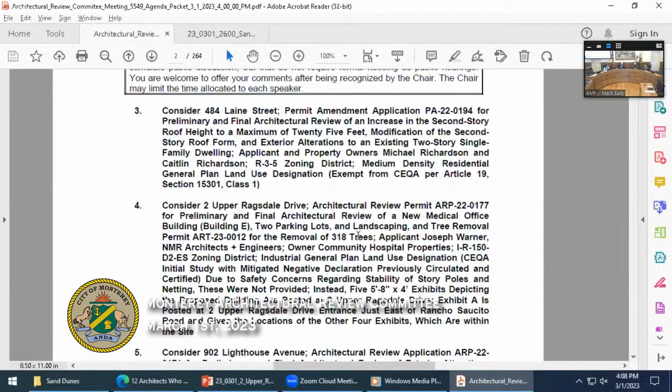All right, thank you. Next, we'll move on to consider item number 4, 2 Upper Ragsdale Architectural Review Permit ARP-22-0177, for preliminary and final architectural review of a new medical office building, 2 parking lots, landscaping, and tree removal permit for that project. Does staff have a presentation?

Yes, my name is Chris Schmidt. I'm a senior associate planner for the city, and I have been working on this project with the owners and architect team. To start with the recommendation, the staff recommendation is to adopt a resolution approving the preliminary and final architectural review and tree removal permit with conditions of approval.

I'm just quickly going through the subject property. It's located out in the Ryan Ranch area, and you can see the area of work on the right. Parking lots are proposed in the orange areas, and a new building is proposed in the yellow area.

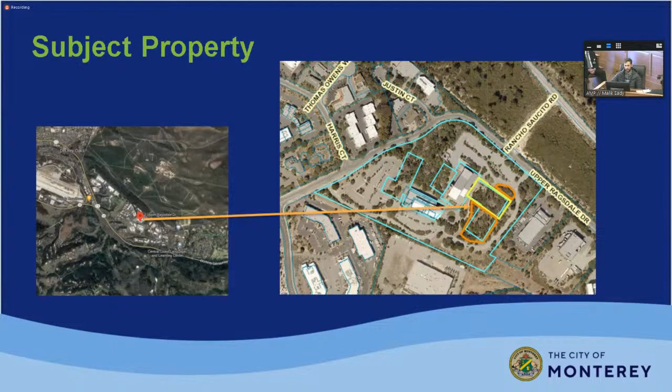So it's a 50,585 square foot medical office building, with a 21 space parking lot at the north side and a 130 space parking lot at the south, as well as new landscaping. The project would require removal of 524 trees, 318 of which are protected trees because their diameters exceed 6 inches at a height of 4.5 feet above grade. So these trees require the tree removal permit. 78 replacement trees are proposed as part of the landscape plan.

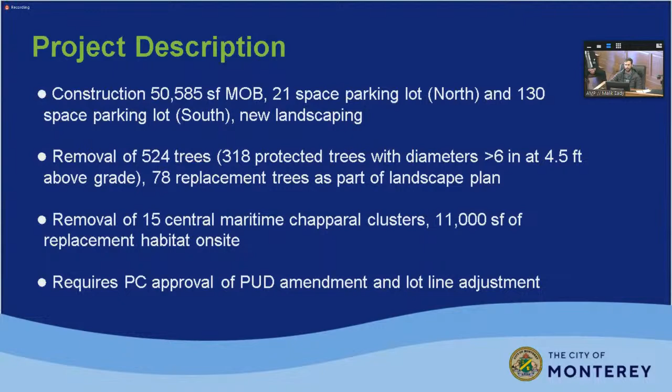The project would also remove 15 clusters of central maritime chaparral, and 11,000 square feet of replacement habitat is proposed on site directly adjacent to the new building. The project also requires Planning Commission approval of a PUD amendment and a lot line adjustment, which has been included as part of a condition of approval for this project.

So here's the site. It's part of a planned unit development that was approved back in 2002, which included 230,000 square feet of medical office space, open space, parking, and driveways. This would be the last phase of that development. The site currently contains over 170,000 square feet of medical office space.

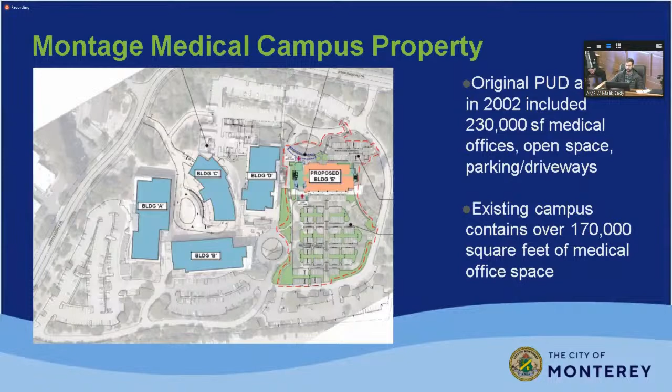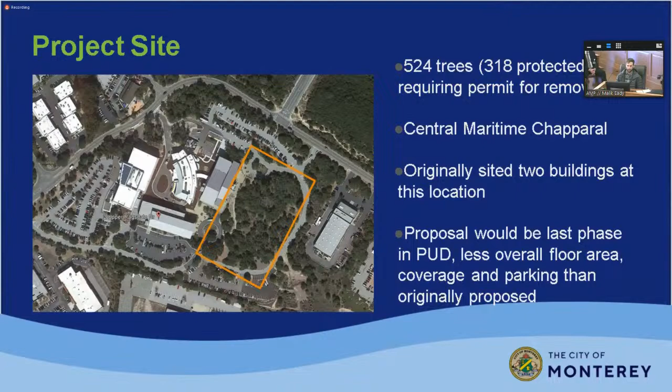So here's that area of work again. I've already mentioned most of the details on the right here. I will add, though, that the last phase would actually be less than what was overall approved in the planned unit development. This site was originally sited for 2 buildings, so it would be less overall parking and less overall floor area than the original proposal.

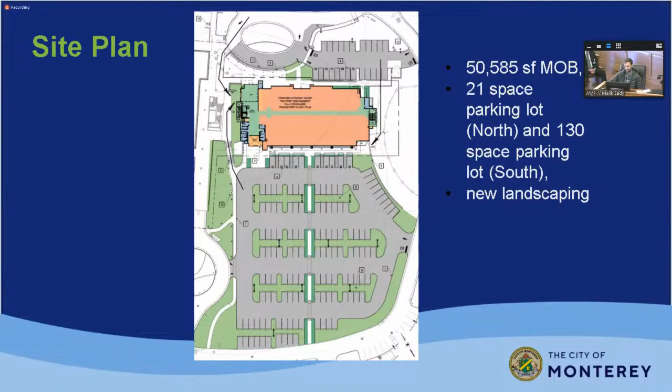So here's the proposal siting location, and I'll just quickly go through these elevations. I have some renderings that do depict the project fairly well that I'll show after these.

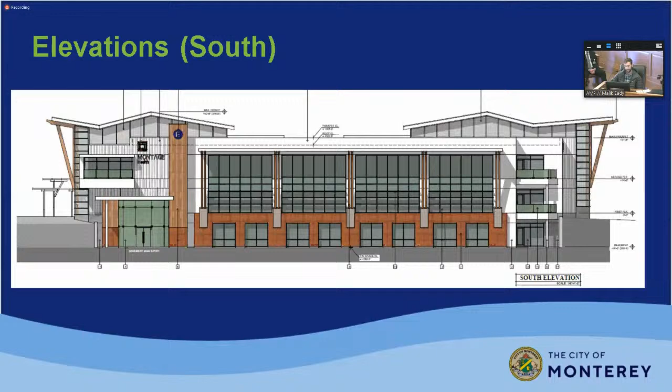And just to provide a little more detail, the proposal design is really similar to what all of the other buildings out there look like - large concrete form surfaces, wood veneer paneling, stucco siding, aluminum windows, steel beams and columns, and in this case a flat roof with parapets, with parts having standing seam metal roofing at the mechanical rooms.

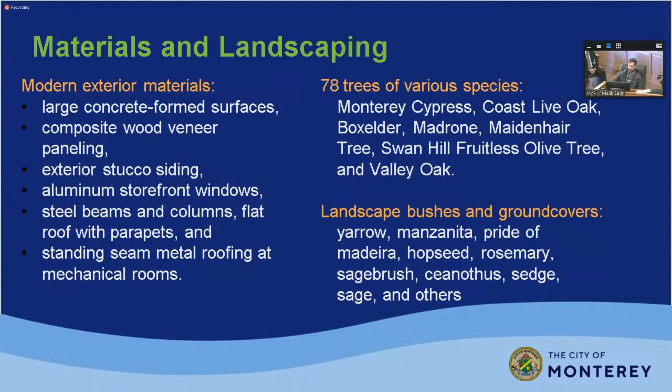A number of replacement trees are proposed, different species listed on the right there, as well as landscaping, and I do have a graphic showing the landscape plan.

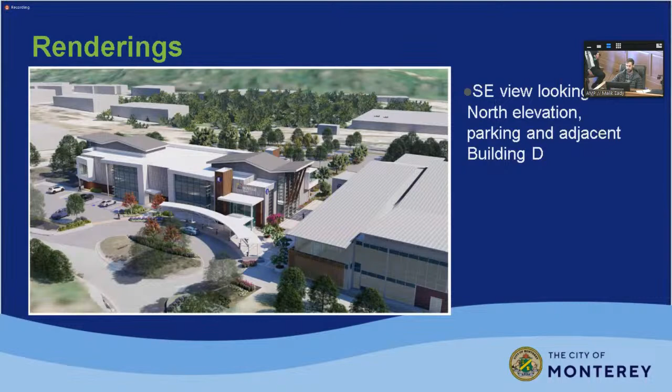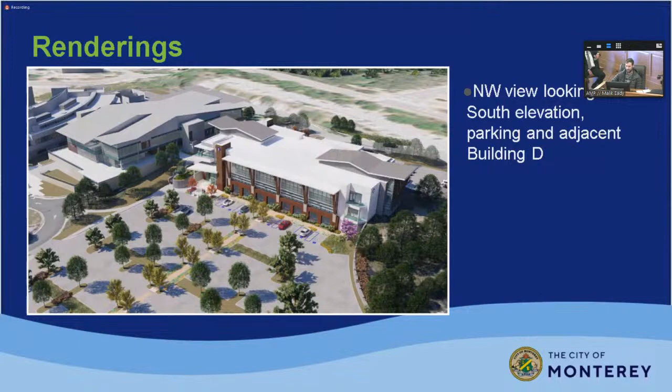And then this is the northwest view of the south elevation, with building D on the left-hand side, and you can see the proposed larger of the 2 parking lots. On the right is the habitat restoration area - the trees in that area would largely be preserved, and whatever remaining space would be used to rehabilitate that habitat.

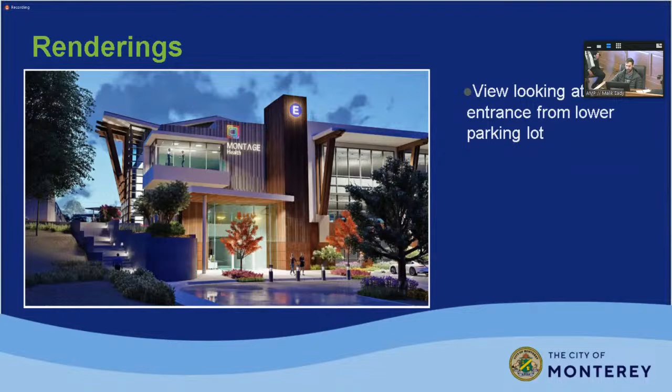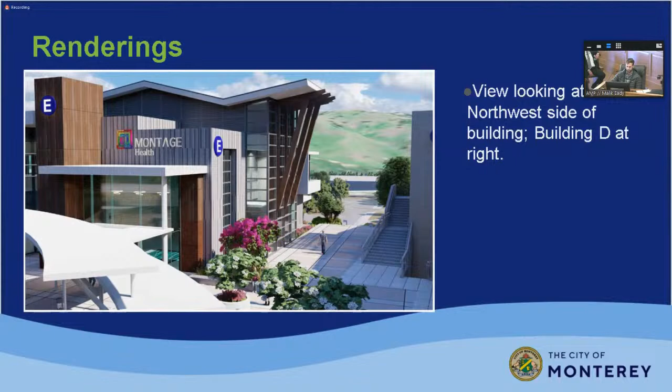And then the individual plantings are shown here - I'm not going to go through each one, though.

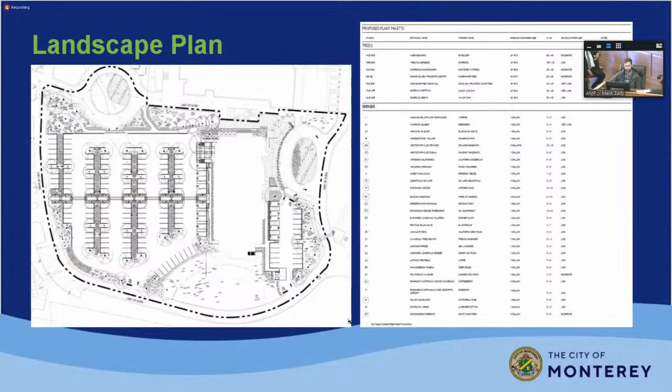So I'll just summarize the findings for approval. Staff was able to make these 4 findings that the ARC is pretty familiar with by now. This project is similar to the existing buildings on site, in terms of massing and design.

There are no view, privacy, or lighting impacts. There are no residential units or anything nearby, and the entire area is industrial zoned and contains commercial buildings and offices - in this direct vicinity it's mostly medical offices. The proposal is also consistent with the general plan land use designation of industrial, which these days is primarily used for office uses.

Staff has included the condition for the PUD amendment, which is necessary for the lot line adjustment. And lastly, this project does use high quality materials that are compatible with the existing development, and includes new trees and landscaping compatible with the surrounding development and the habitat area on site.

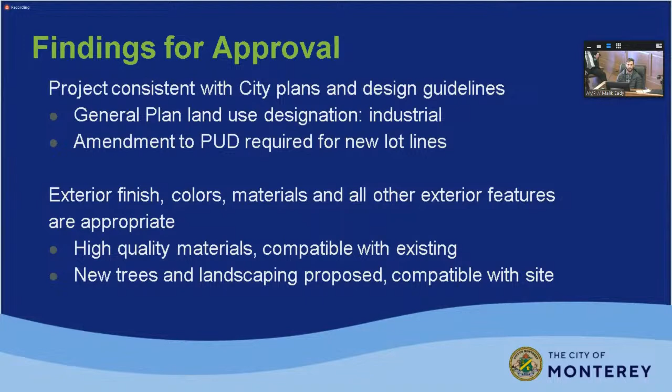The last finding is that in situations where healthy trees prevent reasonable development of permitted uses, the trees may be approved for removal. So the existing trees would prevent reasonable development of an approved PUD, and removal would be consistent with that PUD. The site, as I mentioned, was slated for 2 buildings, totaling more square footage than proposed today, and there is new landscaping and replacement trees proposed.

So that concludes my presentation. Again, the staff recommendation is to approve the project. I am available for questions. The project architect is here as well, and I believe he has some imagery to show as well.

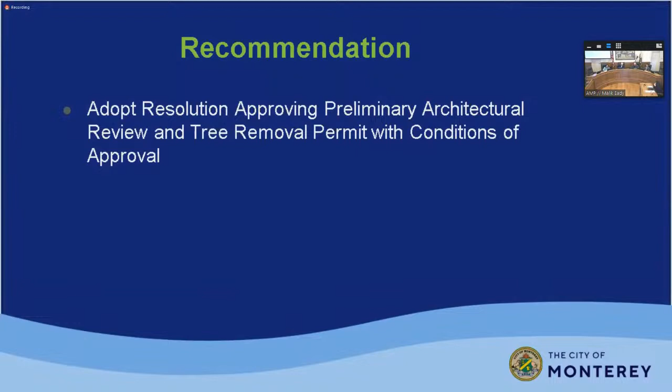Yeah, thanks Chris, nice presentation. So we're taking out 318 trees and replacing them with what, 78, something like that? That's right, 72? And what are the city guidelines for replacement - 1-to-1, 2-to-1, 3-to-1 - and is it based on the usage of the site, or I thought it was more of a, if you take out one tree, you've got to plant 2 kind of thing.

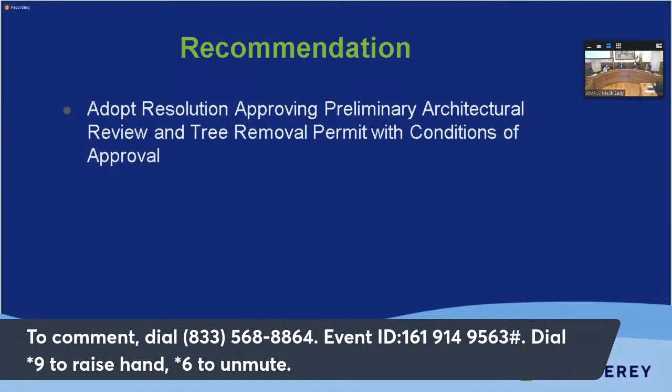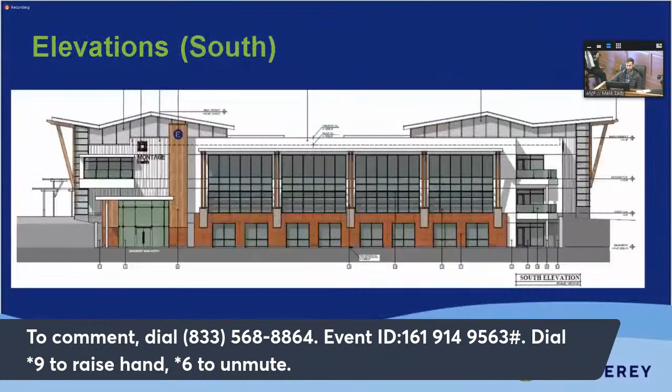So what the city code says, in addition to this finding for approval, is that up to 3-to-1 replacement can be required, but that does include 0 to 3, so no replacement can also be required. What we would look at is whether the site can actually have more trees planted on it, and whether it would be done in a manner that those new trees can survive and don't cause overcrowding. And when we looked at this site, it is already fairly overcrowded.

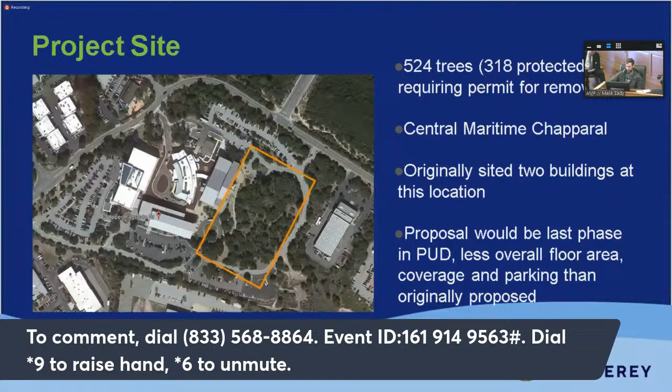Looking at this older aerial of the site, there are trees around the perimeter as well as in the interior. I think they've actually shown a pretty dense planting plan of these trees. There are a few areas that contain just shrubs on this end here, but it was a sufficient plan for this development. I think the architect may have some information as well.

I have a follow-up question. We're asking because I think the city should consider tree planting offsite, and also a fee associated with removal. Those are policies I've seen other cities use. So it's not just about what that site can handle, but it becomes a financial incentive to be more creative with your design, be it underground parking or other methods. That typically forces teams to make those decisions, because it's financial. And if you can do surface parking, then of course they're going to say sure.

It's a good question. The code does say replacement would preferably be on site. I do believe there are options for in-lieu fees. Historically, I think our staff prefers on site because it has the property owner maintaining them indefinitely, whereas sometimes it's harder to have them go water and feed trees that are offsite. There have been a few that I can recall of in-lieu fees or offsite planting.

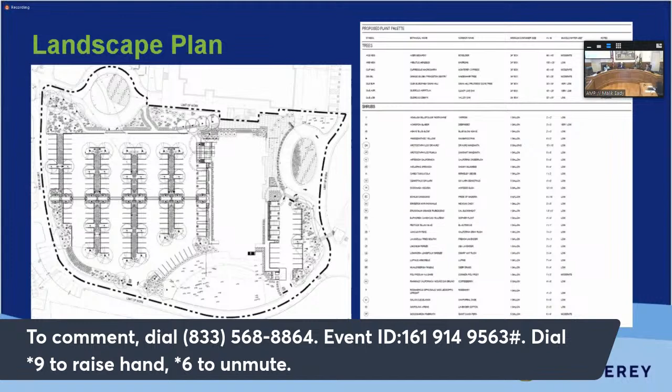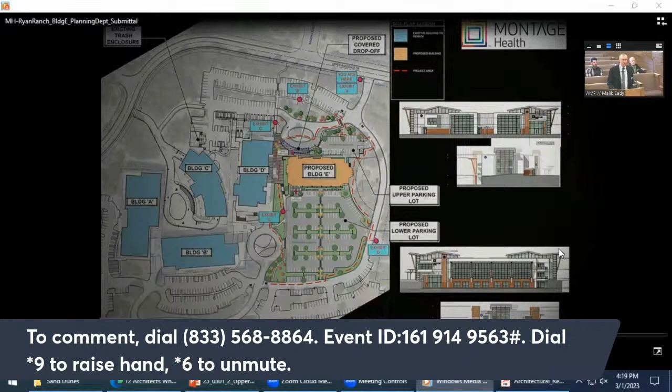Good afternoon. My name is Steve Gonzalez. I'm an architect with Nichols, Melburg and Rossetto. We've worked with Montage Health in the Monterey area for probably the last 15 years.

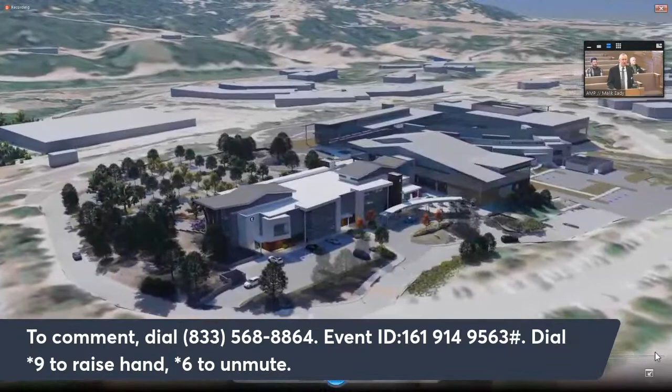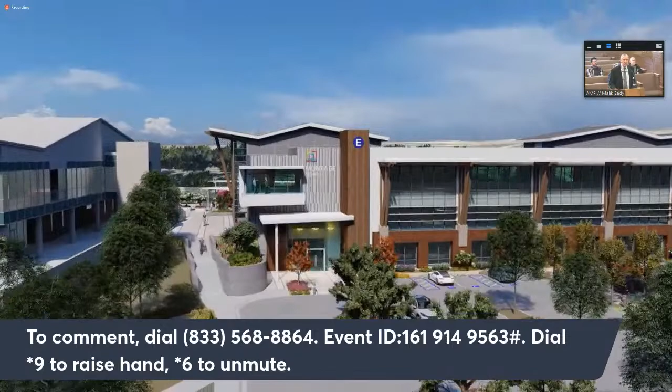I think Chris did a great job of presenting the project. I don't think you folks, if I'm reading the room correctly, have any comments on the content or the use of the project. There was some discussion about the trees, so to respond: if you look at the arborist report, the arborist states that the trees we're removing are in an area with substantial overcrowding, resulting in poor health. Many of the trees being removed have like five trunks coming out of a single common root area, so in general these trees are in declining health.

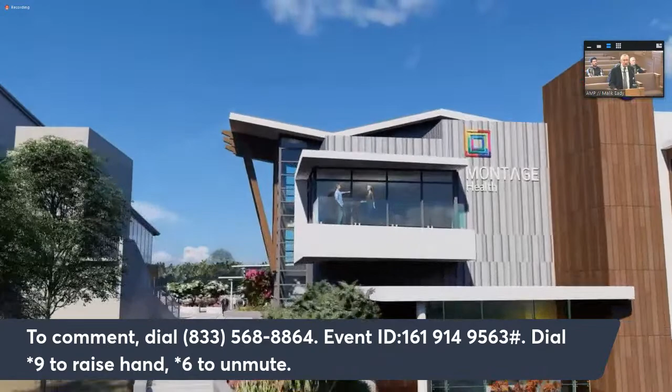Not only in this particular area where the lower parking field is, where the preponderance of the trees are being proposed for removal, but throughout a lot of the Ryan Ranch area, I think you have the same kind of overcrowding and declining health of trees, just from my observations driving around and looking at the area.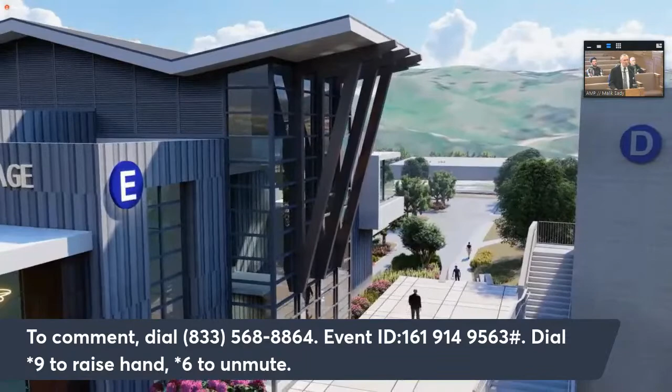The original proposal did have underground parking. Unfortunately, to construct the underground parking, you disrupt basically the equivalent area that we're disrupting for the lower parking field. One of the exhibits, I believe on the site demolition plan in the package you have, under attachment A, shows the outline of our best estimate of what that area of disruption would have been had the project approved in 2002 gone forward.

So our company, and I know Montage Health, we value the environment. We're not here to just recklessly remove trees.

But looking at the stand of trees that we had to work with, we don't see a lot of salvageable area there. And the specimen trees on the site, I think there were 7 of them in the arborist report, 24 inches in diameter or greater.

One of them is dead. It was a beautiful tree at one point in time, 38-inch diameter coastal live oak. But the preponderance of the other specimen trees we are saving.

And they're clustered more or less on the south westerly corner of the site, in an area where they're not subject to overcrowding like the balance of the site is. So we did deliberately design our parking fields and entries so that those trees, which I think are the best on the site, could be retained.

With respect to replanting on the 2 Upper Ragsdale site, I don't really see a lot of opportunity to do that. The areas that would be subject to replanting, widespread replanting, are already forested. And sadly, I think they're in the same situation where there's overcrowding, too many trees competing for sunlight and nutrients out of the soil, resulting in canopy fragmentation and overall poor health.

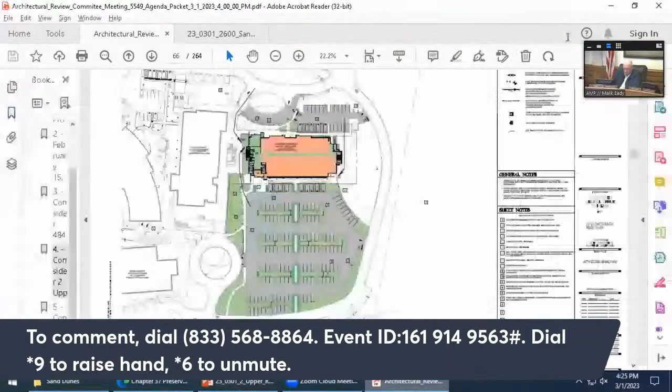Yes, could you show that? One second.

I have been up to that area, and those are scrub oaks. They don't grow very big, and they are very healthy. Trees, they have now found out, do very well crowded because they nurture each other by their roots. This was found out by the scientist who wrote the book, Finding the Mother Tree. So when you disturb all that soil, you're killing all the mycorrhizae that retain water and give sugar to the trees, and the trees in exchange give nutrients to this mycorrhizae. So those trees are fine.

I think this architecture firm needs to go back to underground parking. I don't buy the story that that's going to cause more damage. I don't see how, because they're going to be building on that site anyway, so they dig underneath first on that site. And it's just that area that they're building in where they're putting that underground parking.

I don't see how they're going to avoid having to cause a lot of destruction.

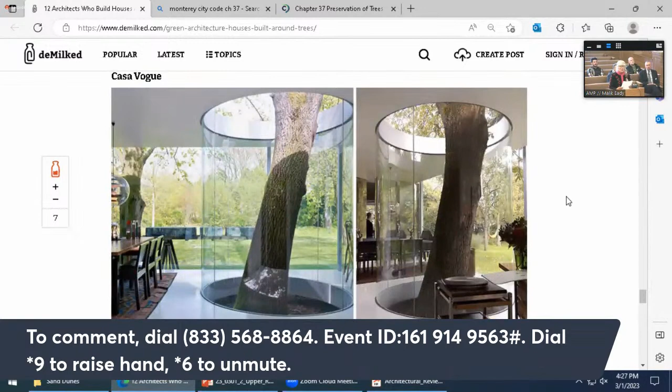I'd like to say that 300 trees supply 78,000 pounds of oxygen a year, and 300 trees take in 13,600 pounds of carbon a year, and one large oak tree can transpire 40,000 gallons a year. So our rainfall will be reduced, the wildlife will be reduced, and you can't mitigate because it takes 50 years, sometimes 100, for these oak trees to go back to the size they were.

So once again, it is a travesty to say that this is a mitigated negative declaration previously circulated. I mean, that's just criminal, because it goes against everything CEQA tries too hard to protect, resources that our very lives depend upon, because removing so many trees hugely affects the air, the water, the soil, the wildlife. And what is CHOMP going to be bringing in? Tons of cement, building products made with wood, tons of trucks, pollution and noise pollution.

So by refusing this permit and saying to them, you have to go back and integrate the trees, you're going to have to do that. And you're going to have to either find another spot where there's less trees, or prove to us that you can be more creative, as we are showing you in this picture that architects do. And they could hire a consultant from the firms that are doing that all over this nation now.

And we are in a climate crisis. We cannot any longer say that one tree or 300 trees doesn't matter, because it matters incredibly. And that's all I have to say. So thank you.

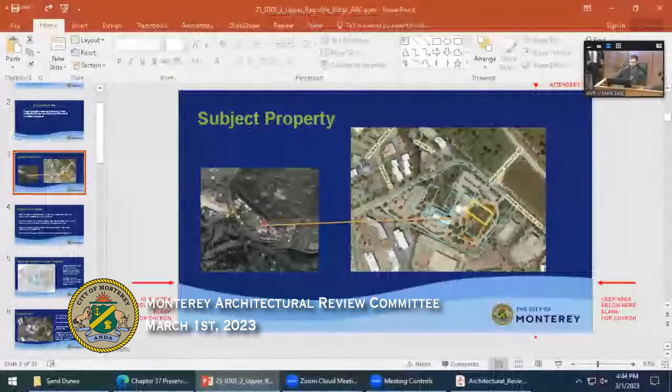Yeah, I think it's important to go back and give some further background information about the PUD, and that these developments are vested, and that this was always the plan—to remove all of the trees in this area and build a completely different structure. So in looking at this, we certainly try the best we can, and I'm sorry, let me share my screen, to preserve as many trees as we can, but this was something that was planned a number of years ago, and the intent was always to remove them.

And in terms of staff's opinion on this, we are actually getting more landscaping and open space than the original would have provided. And the original project did not include any sort of off-site planting or anything like that.

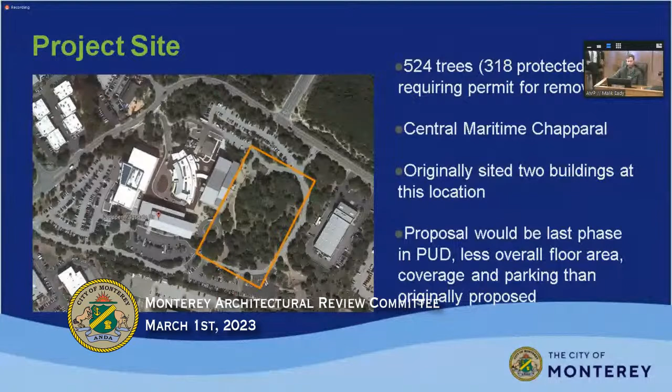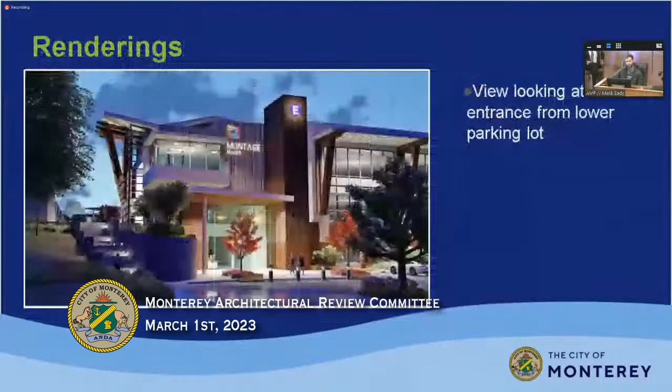And some of it's, I guess, honoring previous approvals, because there's obviously lots of investment and work that goes into getting to a certain stage. So it's sort of part of the city trying to say, we understand that you had a trust in our agreement, even though it was several years ago—20 years ago, 15 years ago. I guess I'll just add on to it.

So there is a subdivision map that the city approves called the vesting tentative map that locks in the rules and regulations at the time and freezes it. This is one of only a couple projects that remain, those entitlements remain valid for the entire life of the vesting tentative map, and the city can't go back later and change the rules. That's part of the Subdivision Map Act, it's built into the regulations. So this layout and area of disturbance was basically agreed upon many, many years ago, almost 20 years ago.

When the original vesting tentative map was approved, we have very little flexibility at this point regarding the impact area, because it's part of the original project approvals. It's different than if the project was being proposed today from scratch.

I'm going to withdraw my motion. Thank you, Patrick.

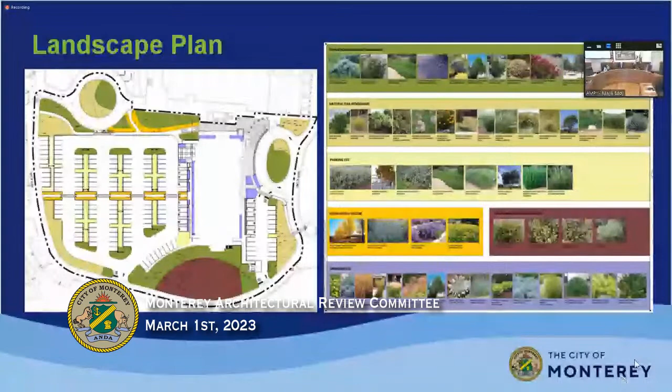Just to follow up though, you were saying those were the options. So I guess the question is, if it's kicked back, is there further aggressive enforcement of the tree replacement numbers or fees or anything like that? If there's not, we're honoring a previous plan, of course, then there isn't really a path forward in that method. If further enforcement and further measures aren't really available, then we have to honor the city's previous commitments.

In response to that, I would say that we have to allow the parking lot and the building to go forward. If the replacement trees don't meet the replacement ratio, we can ask the landscape team to go back and look at additional plantings within those areas and further expansion of additional trees in the landscape areas. But we can't go back at this point and ask them to build an underground parking garage. We could have done that in 2000. We can't do that today.

Okay, go ahead. Did you have any other comments, Brian? The point of public comment and discussion on this has already been closed.

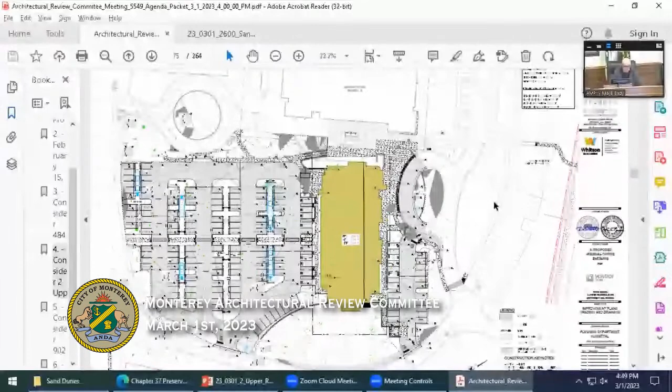I understand the need for progress. I don't necessarily understand the need for continually building more and more parking lots, because I think hopefully someday the model of everybody driving everywhere in a car will slowly decline. So that's my 2 cents.

Kelly? I do have a question for Kim. On that original approval for the project with the parking lot, was it specific to the amount of spaces or the ratio per square footage, or is that not locked in? So the amount of parking is based on our municipal code, I think it's 1 per 275 square feet of office area. Chris went back to confirm that that parking ratio was met cumulatively between all of the buildings. I know the answer to that is yes, but I don't remember the specific numbers.

They were required to provide 837 minimum for the entire complex. So the original proposal actually provided a little bit more than what the minimum requirement was. In this case, since the overall floor area was reduced, there was less parking than what would have been originally approved. And the applicant actually provided even less than that, still above the requirement by a small amount.

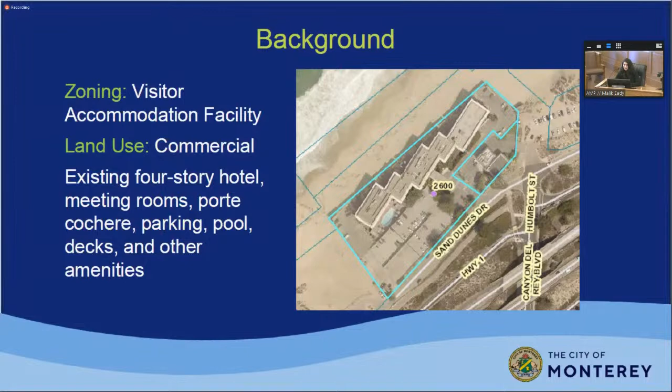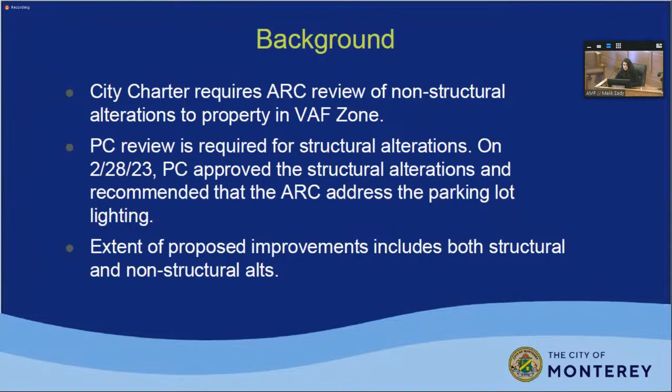The city charter requires that the Architectural Review Committee review any non-structural alterations proposed to a property in the visitor accommodation facility zone, which is why this application is before you today. This application, because it also contains structural alterations, required planning commission review, which happened yesterday. The planning commission approved the structural alterations; however, they recommended that the ARC address the parking lot lighting because they saw it on the plans. The lighting was not a structural alteration, but they wanted the ARC to address it. So the extent of improvements includes both structural and non-structural alterations.

And this is the parking lot lighting that the planning commission wanted the ARC to address. There is a note on sheet AA100 of the plans, which are in Exhibit A, and the note says B42, replace existing site lighting in kind. So these are the 3 parking lot lights here.

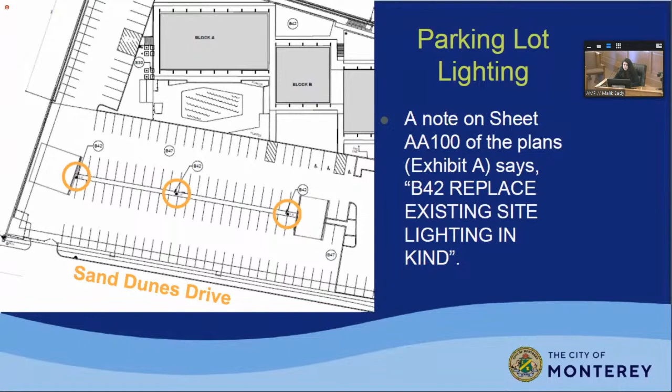There was a public comment made during the planning commission meeting about those lights shining onto the adjacent Sand Dunes Drive and potentially also being visible from Highway 1. So staff is recommending a new condition of approval that the applicants submit updated electrical plans showing these lights will be encased, meaning fully cut off, not create glare, and shine downward to not have an impact on the adjacent roads.

This is the site viewed from the north.

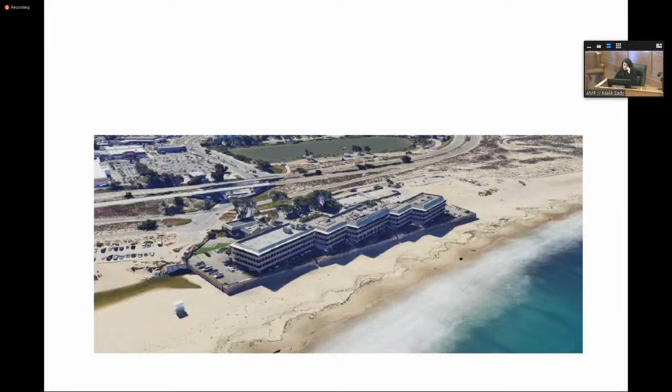I'm going to show you the other exterior alterations proposed. There is a porte cochere in front of the lobby, and there's an area of the porte cochere that is proposed to be demolished. I'll show you that in more detail. The structural alterations that the Planning Commission already approved include stairs on the south and north sides of the hotel to allow for better exiting routes for hotel visitors and staff.

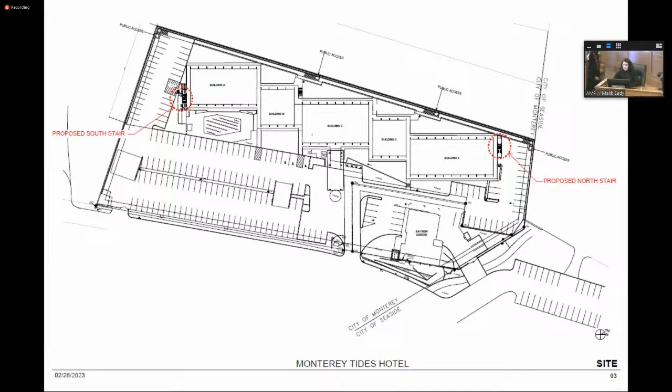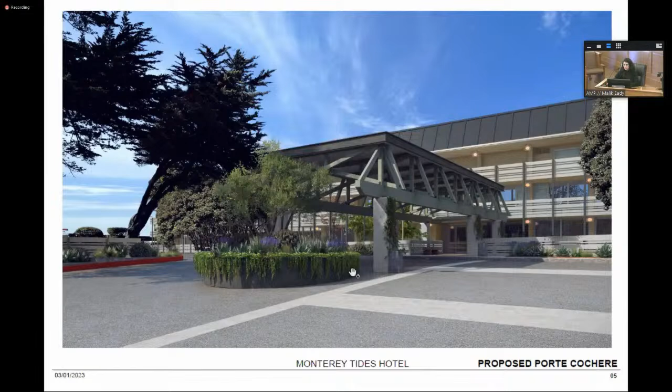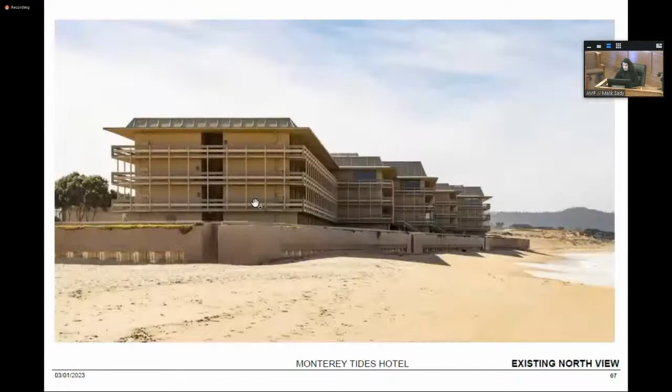This is the existing view of the north side of the hotel, and these are the stairs that were proposed on the north side.

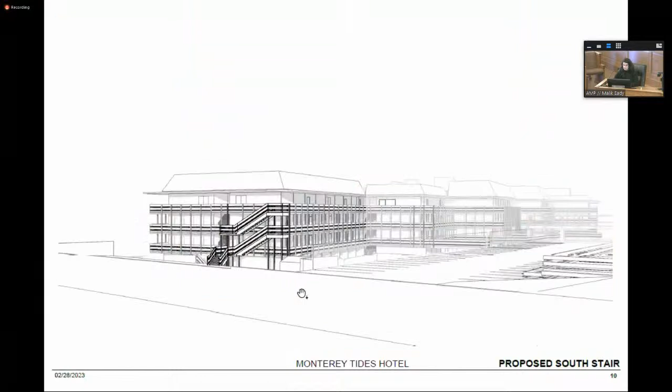This is the south side of the hotel, and these are the stairs for the south side. These are the elevation drawings, just showing the stairs. No other massing is proposed. Everything else is a renovation or replacement of existing features.

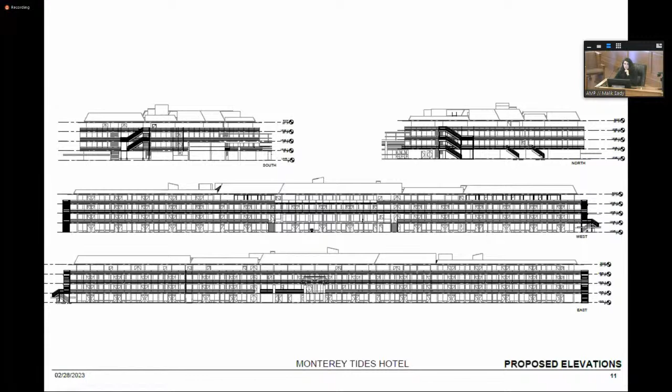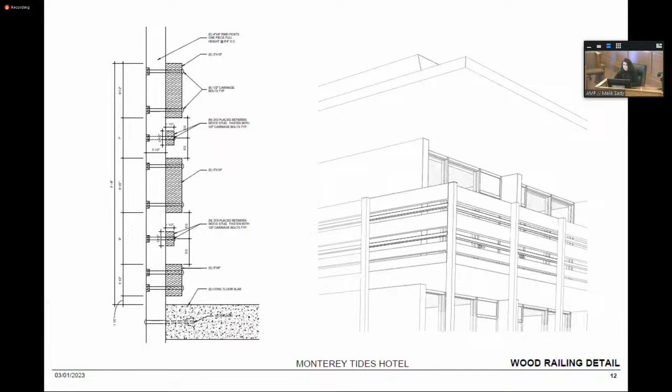This is the detail of the railing. All of the railing will be replaced with wood railing. The stairs will also have the same wood railing. These are the existing hotel colors.

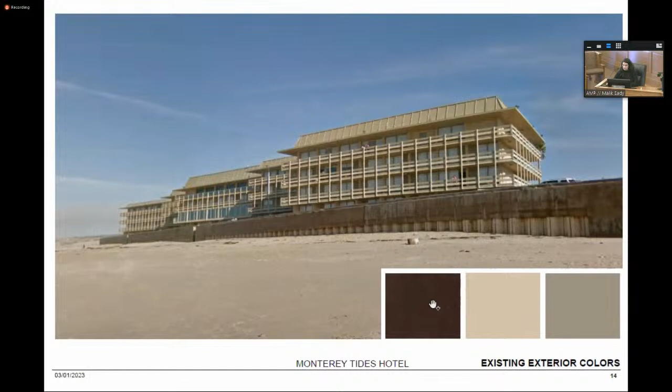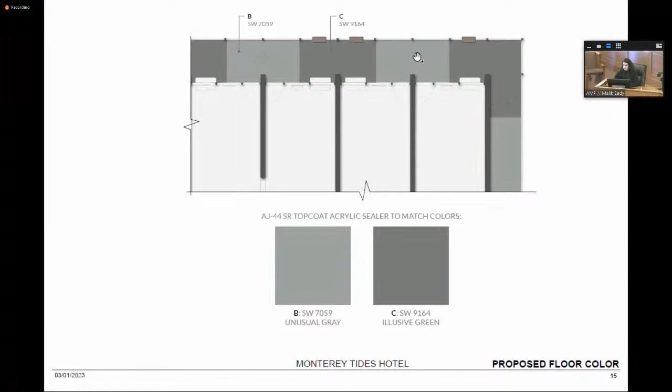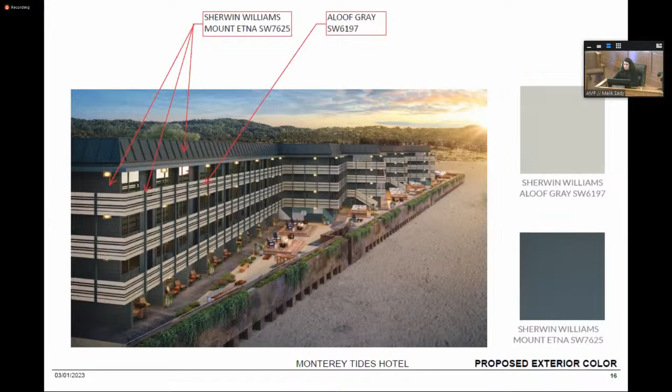The proposed colors are different shades of gray. They're actually proposing to paint the floor of the hotel corridors with this checkered gray pattern. This is a mock-up of the proposed colors, so the dark gray would be the wall color, and the wood railing would be a lighter gray.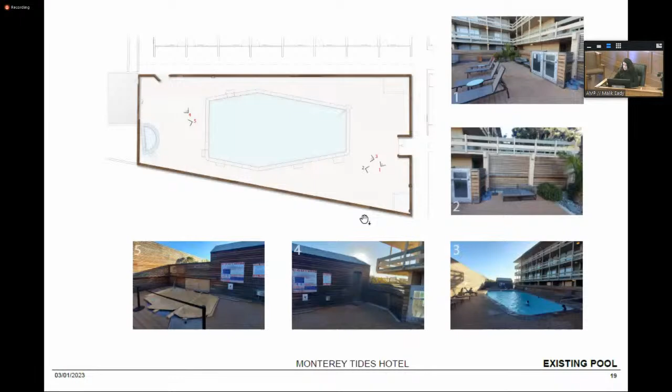The pool is proposed to be given a facelift. It wouldn't get bigger, but the fencing would be painted and cosmetic upgrades would be made to the furniture and the fence.

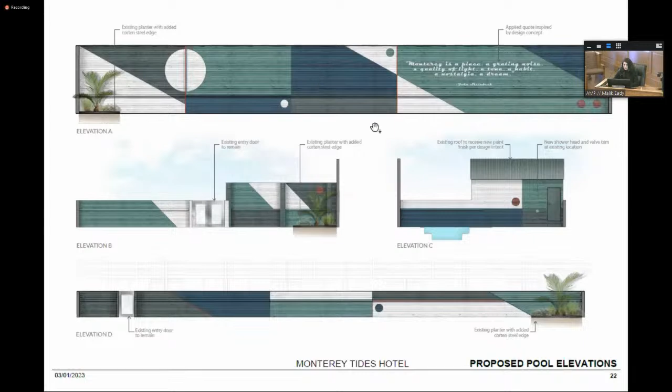This is the proposed color scheme for the fence. That's inside? Inside. Yes.

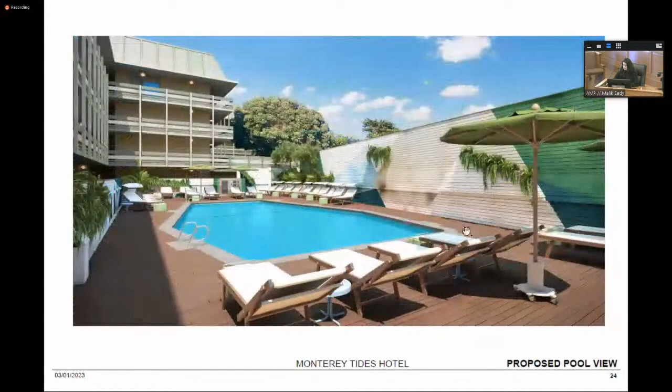There is an adjacent meeting room building called the Bayview Center that is also proposed to have the same color scheme. They're also proposing to replace all the signage for rebranding purposes, and that will be required to receive a sign permit in the future.

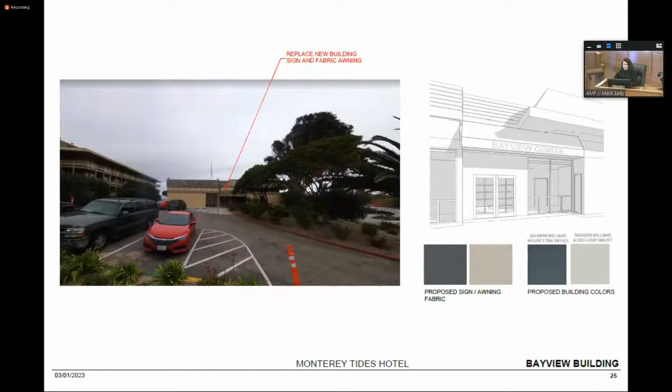This is a view of the existing hotel, and these are some barbecue or fireplace areas outside.

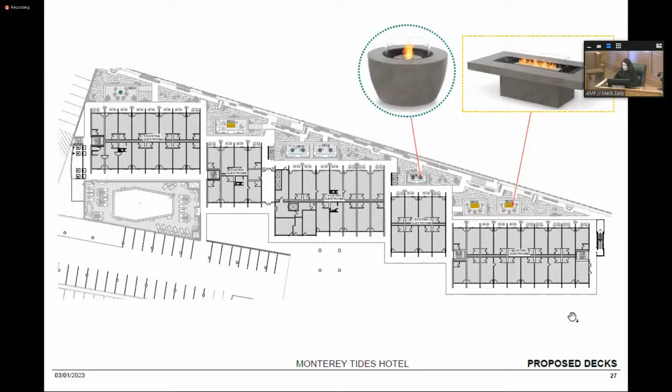The proposed siting, form and mass, architectural style would be appropriate for the project. The stairs would be exposed, as you saw, which reduces the appearance of massing, and the siting of the stairs would not be readily visible from the front of the hotel. The new stairs and renovated porte cochere, railing system and roof system would match the hotel's existing architectural style.

The project would not unreasonably impair views, privacy or living environment. The stairs would not pose an issue to views or privacy, and there were no view impairments identified. The other renovations consist of repairing existing systems in kind or with similar or same materials.

The project is consistent with the general plan as well as all applicable design guidelines. The project is designed to maintain the commercial character of the building, and all the renovations are commercial in nature. The finishes, colors, materials, landscaping, lighting, and fencing are appropriate.

Most of them consist of repairs. The finishes would be wood for the railing, metal for the repaired mansard roofs, and muted colors to complement the natural beach setting. As conditioned, the site and building lighting would be encased, not create glare, and shine downward.

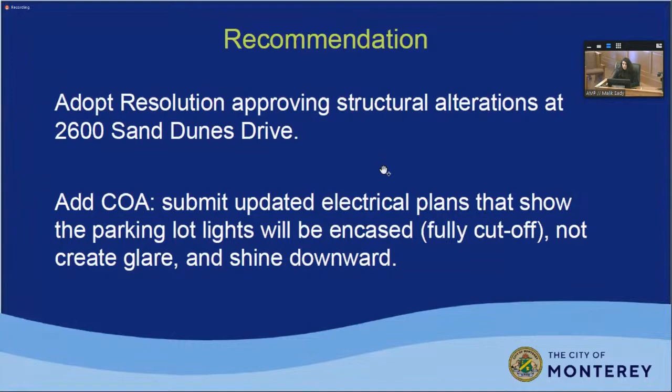Okay, thank you, Fernanda. Any questions for staff? Regarding the lighting, is an alternative of shorter light poles also possible? That was not part of their proposal. So if you think that would help reduce any glare, you could propose that, or propose that staff explore that with the applicant.

Any other questions? Actually, sorry, one other question. The stairs—the reason they're there is because they're required by code, given the slight change in use, is that right? I do not know the exact answer to that. I just know that they were added to provide better exiting, and they exit onto the parking lots on either side.

All right, no other questions of the committee. Does the applicant like to make a statement or comment? Nope. Okay, all right. If none there, I'll open up for comments from members of the public on this item. Any in the chamber?